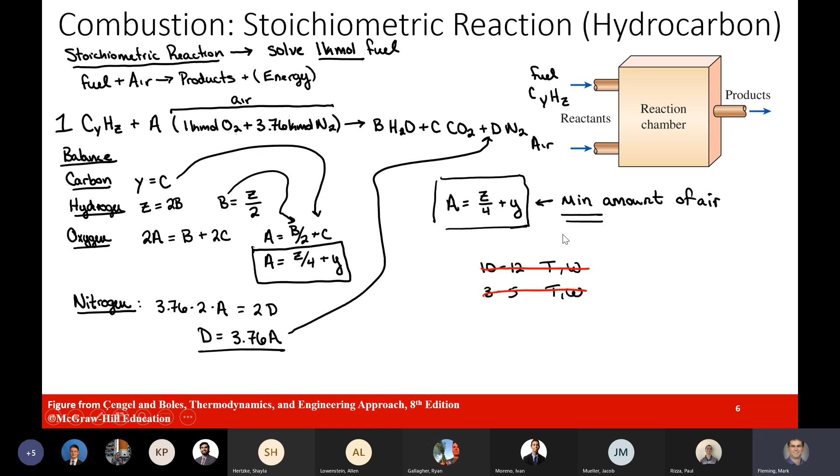Okay. Now, in terms of actual combustion, what we expect is that our air is actually going to be more than just this stoichiometric value. The stoichiometric values that we've put in this equation assumed that the amount of air was related to A, and we said this A represents the minimum amount of air that we could add. And so if we added any less, we won't have complete combustion. But if we don't have complete combustion, we're wasting fuel. And so it's usually a little bit better to make sure that we have complete combustion.

So we generally want to bring in excess air. So we want to bring in more air than is needed. So we just have extra air. And so if we have more air in the reaction, we still have the same combustion, but we're going to have oxygen as a product. And so that's something that we're going to want to address.

So we want to bring in sometimes more air and get oxygen as a product, just to make sure that we're using all of the heat, all of the energy that's in our fuel. Now, to address this, we're going to come up with a new term, and that new term is called the percent of theoretical air.

And so the percent of theoretical air, by definition, is going to represent the mass of the air, or mass flow rate of the air, divided by what we're going to say is the minimum amount of air. Now, in terms of the minimum amount of air, we're going to call this the stoichiometric condition. And so the stoichiometric condition is what we were using before. And so we're going to adjust the amount of air we actually used based on the stoichiometric value. And just because we technically call this percent, we always have to multiply by 100 to get that into a percent. And so we would expect this value to be much greater than 1.

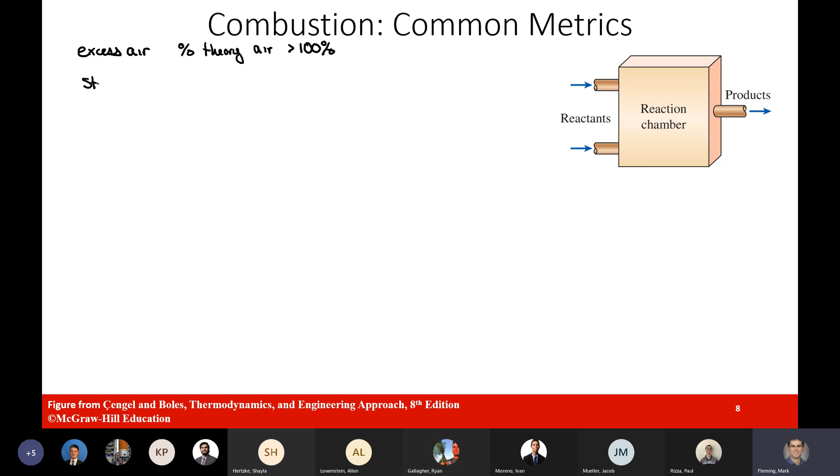And so this is going to be bringing in the excess air. And so this means that our percent theoretical air is going to be greater than 100%. And so extra air is in our system. This is the key thing to note. And so what we want to do is we want to now adjust the stoichiometric balance so that we can deal with extra air.

So we have to go back to the drawing board. We still want to do this per unit of fuel that we have coming in. So we'll do this again for our hydrocarbon fuel. This is going to be C_Y, and then we'll have H_Z. We now are going to add in our air. We now are going to have some multiplier. We'll call that X, which is going to multiply the amount of air that we're bringing in. So we now bring in extra, and so we'll have that out front. And then we'll have O2 plus 3.76 times the nitrogen.

This then gives us our byproducts of combustion. So B times H2O plus C times CO2 for our carbon dioxide. And now we're going to have our nitrogen, D times N2. But now, like we mentioned on the previous slide, we're going to have some oxygen that didn't go through combustion. So we have E times O2 as a product. And so what we're going to note is this multiplier X right here. This is going to be based on the percent theoretical value.

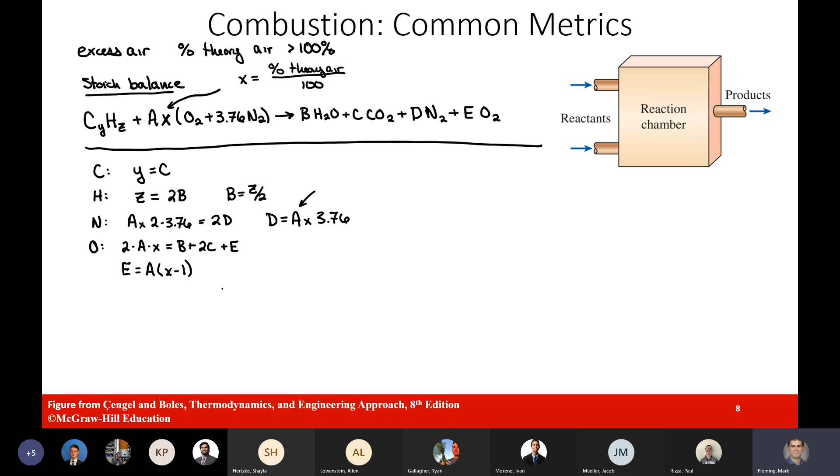And so what this means is that in terms of the amount of oxygen, that will just be whatever we have beyond the X value. So we can just scale that up. And then that is the amount of oxygen we'll have remaining. And so again, this is just adjusting the stoichiometric balance that we had for the amount of extra oxygen that we now bring through.

Okay. And so at this point, we know we're going to have extra oxygen and we should have complete combustion. However, we want to note that we don't want to overdo the amount of extra air. We want enough to ensure that we have complete combustion. But if we add too much air, then we're starting to increase the mass in our system, which means that we're going to spend more energy heating that mass up. Maybe we won't get as hot of air or products as we come out.

And so we do want to try and keep track of the energy that's going to be released. Yeah, so there'd be a 2E here as well. Yeah, that's where the things canceled out.

And so one thing to just keep track of, though, is that mass flow. We don't want to overdo too much extra air, but we do want enough that we keep a pretty good air to fuel ratio, such that we're making sure that we do have complete combustion. So that is the notes that I have for the air to fuel ratio and excess air. And we'll work an example of this later today.

Okay. Now, the last thing that we want to note is how do we figure out, in actual real life situations, how much excess air did we actually have? We are going to be doing this in one of our labs, and you need to do this for the homework. So I'm going to point out the method that we have for dealing with extra air, and we're going to be using something called an ORSAT gas analyzer.

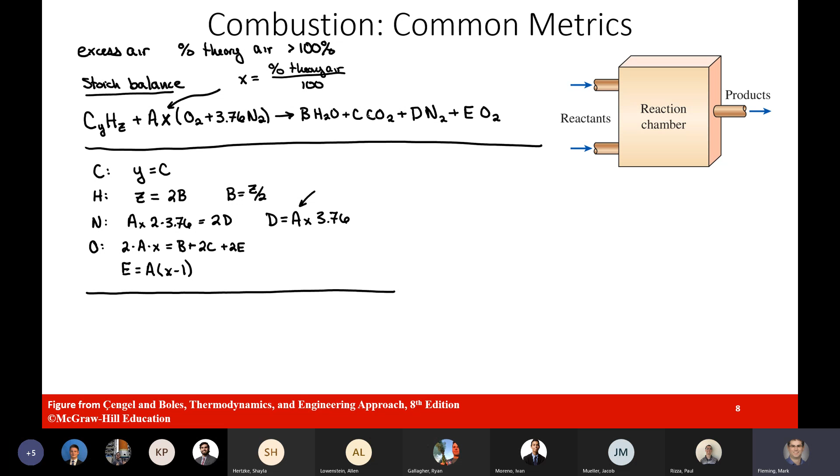Now, in terms of the measurement, if we looked back at what we needed, we were doing this on the molar basis. And we said it's going to be really challenging to make a measurement of individual masses, or figure out how many individual molecules of each one of these. So we have to figure out a clever way of being able to figure out the mole values of each of these different components. And so what the ORSAT gas analyzer does is determine the molar basis of the products.

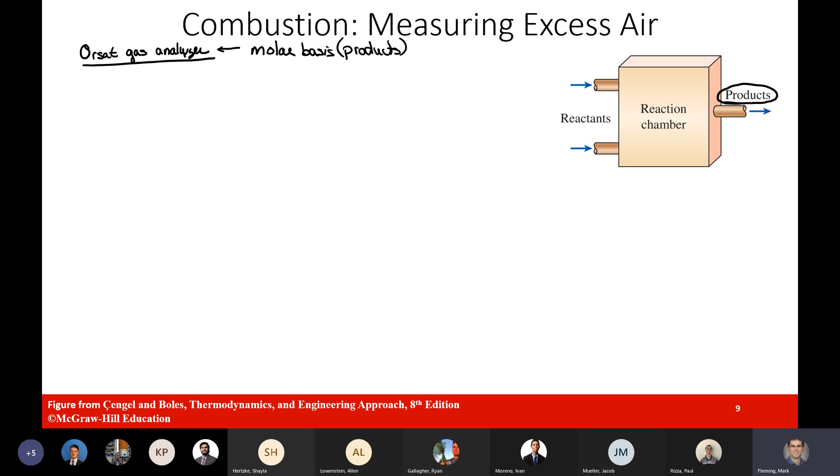And what it does is it goes back to the idea of simple gas mixtures. It takes some of the gas and pulls it out of the flow. And then it is able to figure out what the volume of that gas is at a given pressure. And then it changes this gas sample and it measures the volume before and after. Now, if we go back in our notes, we said if we kept the pressure constant, maybe right about atmospheric, the partial pressures or the partial volumes for this type of analysis could be related to the mole fraction of each of the different components.

And so we're going to be able to take the ORSAT gas analyzer and look at what is the molar contribution of O2. We're going to get that into the mole fraction of O2. And from that mole fraction, we will be able to back solve for X. And from that, we can get our percent theoretical air. And so that's the exact process that we're going to do, because we're going to use this analysis technique.

Now, we don't have to worry about actually doing the math on this. This is taken care of by the device itself. It will give us what the mole fraction of CO2 is, or in this case, we're going to look at it for oxygen, and we'll be able to then look at the composition of the system. And so that is the goal, and this is what we'll be doing in lab. You do need to do this on the homework, and that's why we're going to work through this.

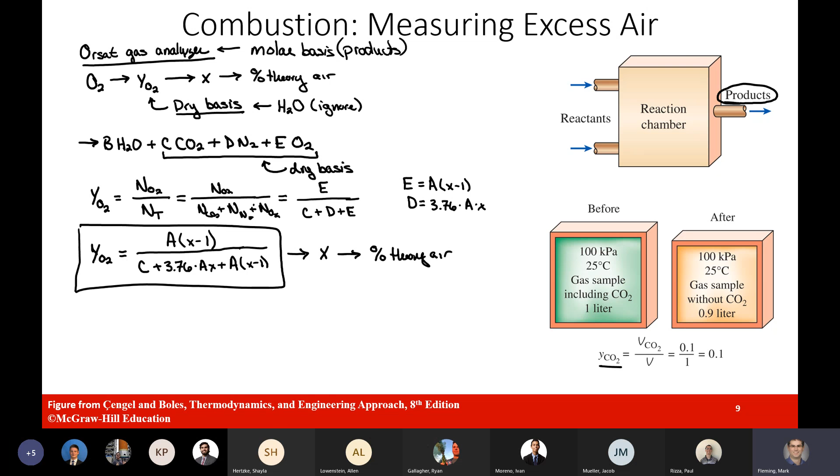Okay. And so that is essentially the way that we're going to deal with combustion, measuring extra air. This is how we determine whether we have a lean or a rich mixture. We're able to look at what's happening in the products. And so that's the end of the PowerPoint. I did want to quickly go back here to this setup.

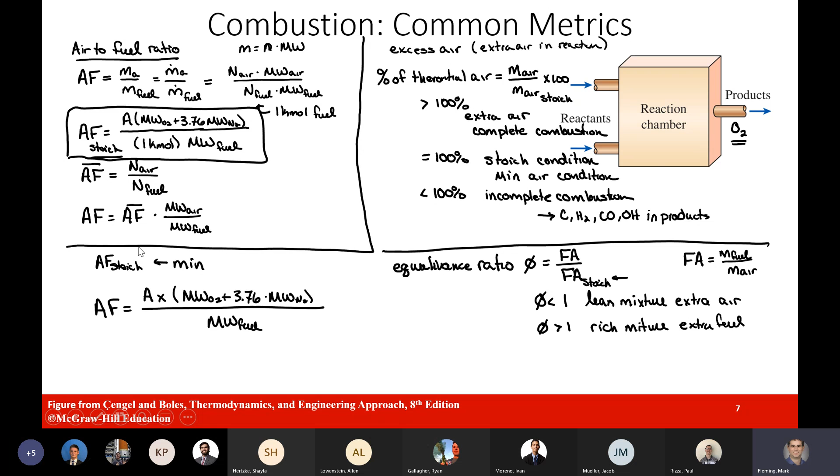And so I forgot to mention that. I was meaning to do that. So I just wanted to point out, now that we have extra air, we're able to include that. All we did is we modified this now by that variable X. And so we can figure that out. Okay, so that's the last thing I wanted to note in terms of combustion and our introduction metrics. And so at this point, let's go ahead and work an example problem.

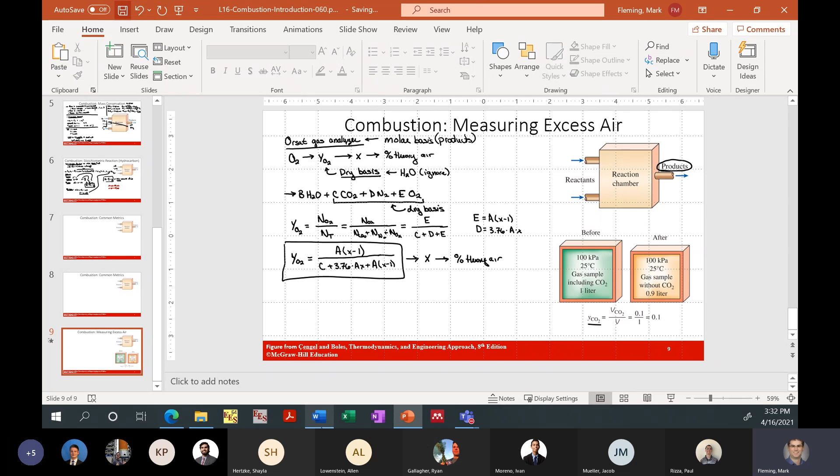So we'll go ahead and pull that up. This example problem is based on a problem from your textbook. We modified it a little bit. We're going to be dealing with a hydrocarbon fuel. So here we have this fuel, C8H18, and we're going to be burning with 50% excess air. So that means percent theoretical, 100% or 150%. X is going to be 1.5.

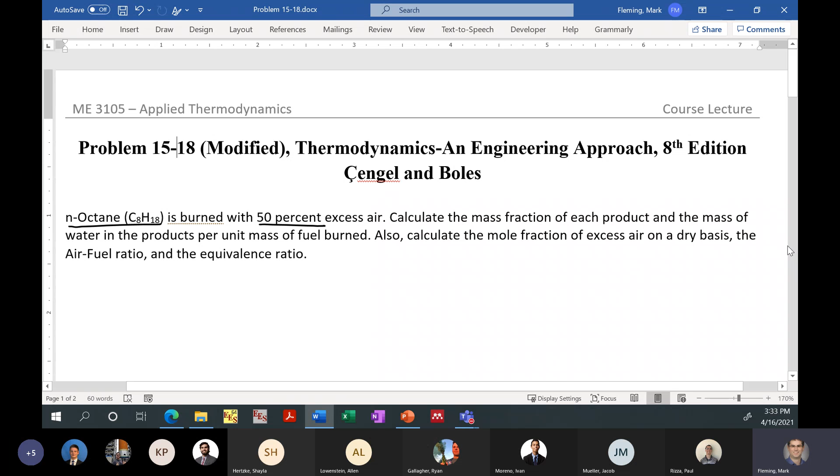We're asked to calculate the mass fraction of each of the products and the mass of the water per mass of the fuel burned. We're also asked to calculate what is the mole fraction of excess air on a dry basis, the air to fuel ratio, and the equivalence ratio. So basically, this is going to be a test of whether we can use all of the terms that we now know and work through all of the combustion setup and combustion metrics.

So let's go ahead and get started by writing down what we know about the system. In this case, we know what the fuel is. It's C8H18. So this is our hydrocarbon fuel, and we have 50% excess air. Now the excess air, we said this means that X is going to equal 1.5, because this value means that we have 150% theoretical. So 150% divided by 100 gives us that 1.5 value for X.

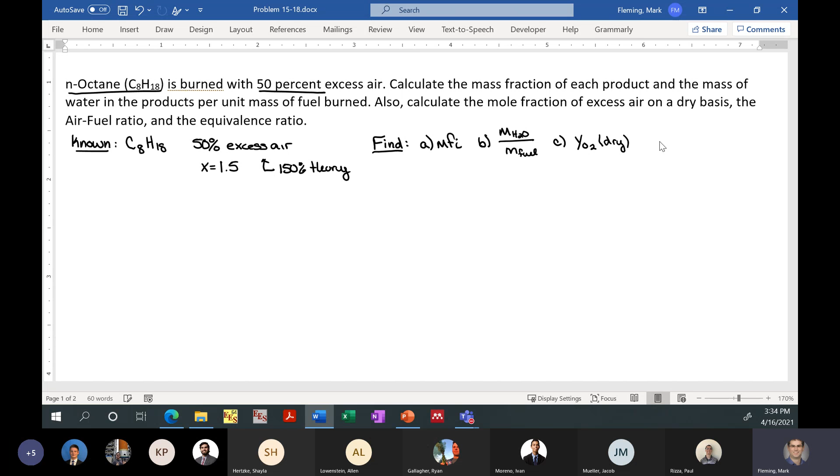Now, in terms of what we're asked to find in this problem, we are asked to find the mass fraction of each of the components in the products. We are then asked to determine the ratio of the water in the products over the amount of fuel that we put in on a per mass basis. We are also asked to determine the mole fraction of O2 on the dry basis. We are asked to determine the air to fuel ratio, and the equivalence ratio. And so that gives us all of the things that we need to find on this problem.

In terms of getting from the known to the find, we are going to make some assumptions. The main assumption right now is that we are dealing with complete combustion. We'll eventually talk about why we have to assume it. The complete combustion assumption just means that all of the products are just going to be the ones we've talked about: carbon dioxide, water, nitrogen, oxygen. We don't have any individual components of the fuel or any sort of incomplete process. That means we can deal with it in terms of that ideal stoichiometric setup. Okay, so in terms of the assumptions, that's basically it. So we can go ahead and get into the analysis for this problem.

Now, the first thing we want to do when we deal with these types of problems is we're going to need a lot of molecular weights. So let's go to the back of the textbook and look up the molecular weight for all of the different components. We'll start with the fuel, C8H18. This is going to equal 114.231 kilogram per kmol. Then we'll need the molecular weight of water, which is going to be 18.015 kilogram per kmol.

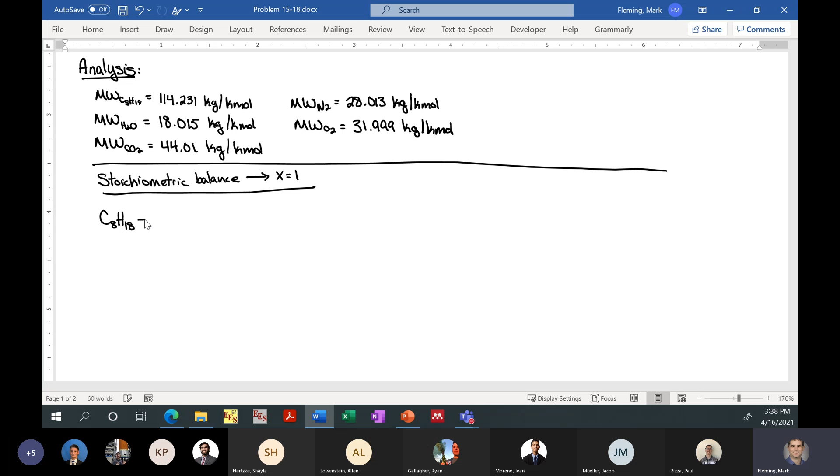And so in terms of our stoichiometric balance, we're going to have our fuel C8H18. We are then going to have our A for air, O2, plus the 3.76 times N2. This is going to give us B times H2O, plus C times CO2, plus then D times N2. And I'll go ahead and just say D is going to be 3.76 times A times N2, because we already know that value.

Okay, so now that we have that up, let's go ahead and balance the system. And so let's start with the carbon. In terms of the carbon, the left-hand side, we have 8 carbon in our fuel. On the right-hand side, we have C number of carbon in CO2. So C equals 8. And so that was pretty easy.

Okay, now go ahead and move on to hydrogen. And if we do the hydrogen balance, we see we have 18 hydrogen in our fuel. And then we have 2 hydrogen in water times B. So we have 2B. And so we know that B is going to equal 9. And so there we go. We got the number of carbon. We got the number of water that we're going to have come out. So now we just need to balance the oxygen.

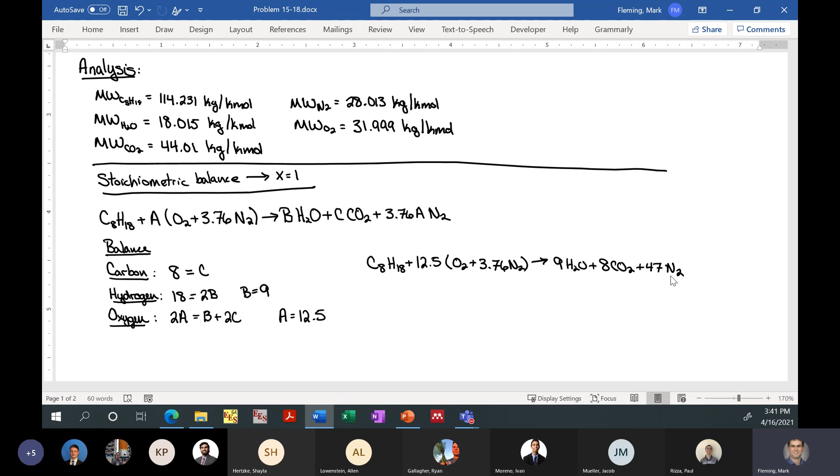So we'd have C8H18 plus now 12.5 times O2 plus the 3.76 times N2. And then we can go ahead and say, well, then we have B times H2O. In terms of that B, that was 9, so 9 H2O plus 8 CO2 plus then 3.76 times A, and so that gives us about 47. And so that would be our perfectly balanced stoichiometric system.

And so that's going to help us because now we're going to redo the setup and we have to address the extra air. And so when we have the extra air, this means the X value we have is going to have that 150%. So that means we have 0.5 times more than we would before. So X is going to equal 1.5. And so that came from the setup we had before. And so again, this is where we can go ahead and make the adjustments to our equation.

So now we're going to have our C8H18. And so then we can say, okay, now we can go ahead and add in A times X times O2 plus the 3.76 times N2. This is going to give us the amount of water, so B times H2O plus C times CO2 plus D times N2. Now we're going to note that this is just a passenger, so we can say this is AX 3.76 times N2. And now we're going to have the amount of extra air, so then this ends up being A(X minus 1) O2.

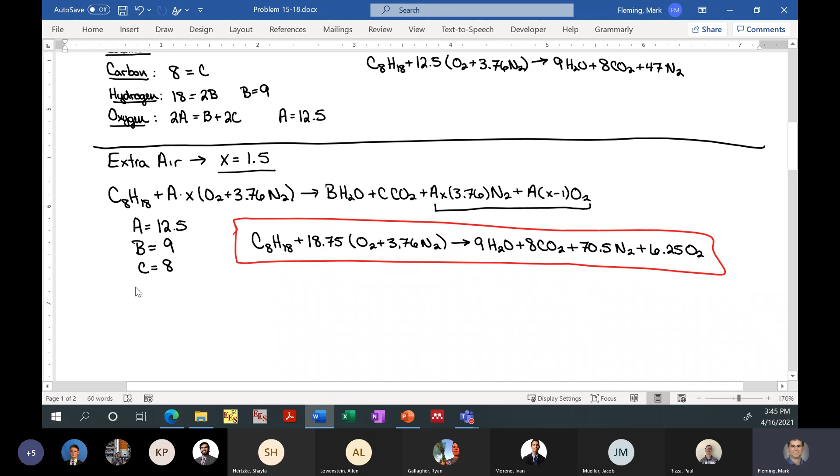Okay, so let's go ahead and continue pushing forward. We'll see how far we get. We might have to finish up this problem on Monday.

And so in terms of the things that we were asked to find, we were asked to look at what was the mass fraction for each of our components. And we said the mass fraction is going to equal the mass of each individual part over the total mass. And we're going to note that we're doing this for the products. And so we have to first convert everything that we have from moles into mass. And so at this point we said, well, we can do this. Let's do this analysis for 1 kmol of fuel.

So again, everything that we're going to do is we're going to basically assume that we had 1 kmol of fuel, because the stoichiometric balance that we've done is all scaled to 1 kmol of fuel. And so that means we can go ahead and calculate the mass of each individual component. So we'll just say the mass of component i is going to equal the number of moles of component i times the molecular weight of component i. And so we've already looked up the molecular weights. We just now need to figure out the number of moles.

Now, the number of moles we're going to use, those are going to come from the stoichiometric coefficients that we just determined in the previous part. So if we were to do this for water, H2O, this would then be the number of moles of H2O times the molecular weight of H2O. And what we're going to do is substitute in for the number of moles here. This would equal the coefficient B. So again, this is going to equal B times the molecular weight of H2O, where B was the stoichiometric coefficient.